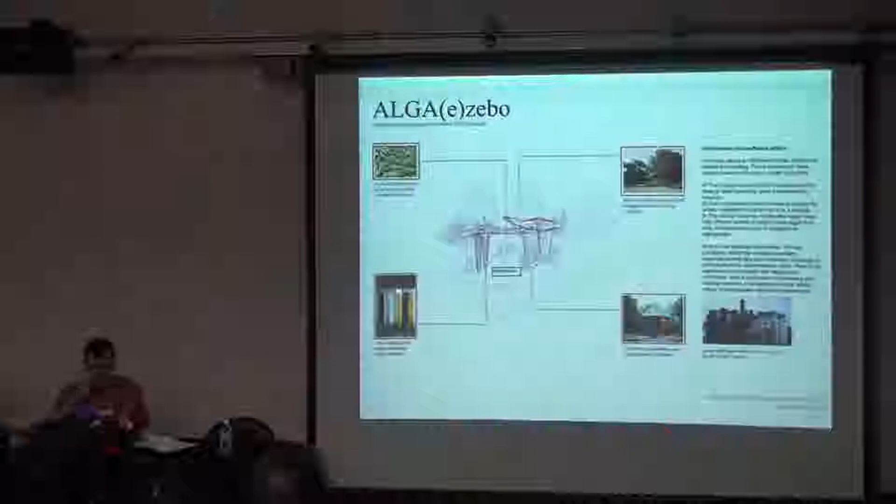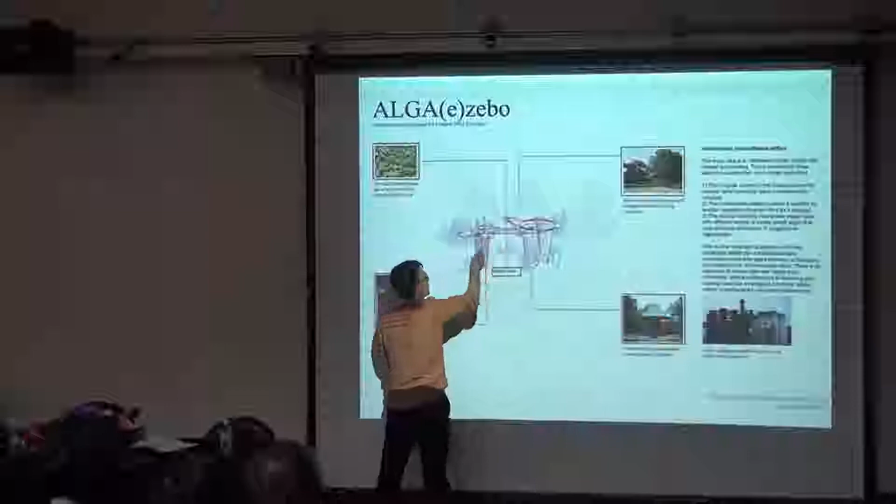The idea of this installation was to create a small structure with a canopy, a small roof, and a few columns - one you could sit in, another would have algae. The merger with nature would happen on three levels.

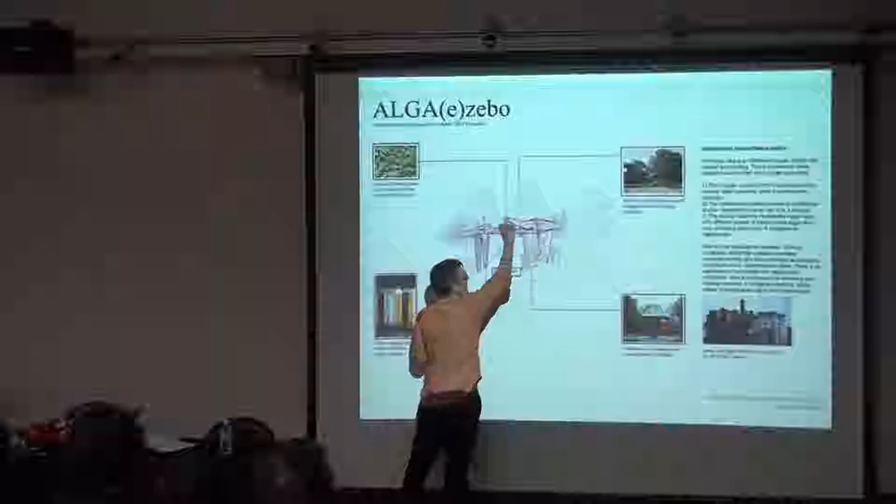On one hand, you could have it really seen, as you'll see in later images, as a piece of nature - it itself looks a bit like a tree. At the same time, it would create a scaffold for ivy to grow into in other parts - more the traditional sense of architecture as a scaffold.

The third level is where the algae grows around particular 3D printed objects. The initial thought was that the algae starts growing in it, and then it gradually also has vegetation around it.

Here you see the three levels: the complex geometry of the trunk with the leaves, the scaffold that holds the plants themselves, and the algae inside the tubes.

For this, we spent a long time drawing this patternization with a script for the perforation of the steel. We used a German manufacturer - the one that did, and still does, all the complex steel constructions for Anish Kapoor.

Back and forward, a lot of design iterations before it went on site. Here you can see the components into which it was subdivided into main chunks that could be stacked on the truck, because it was all manufactured in Germany and brought to London during the Olympics, or just before.

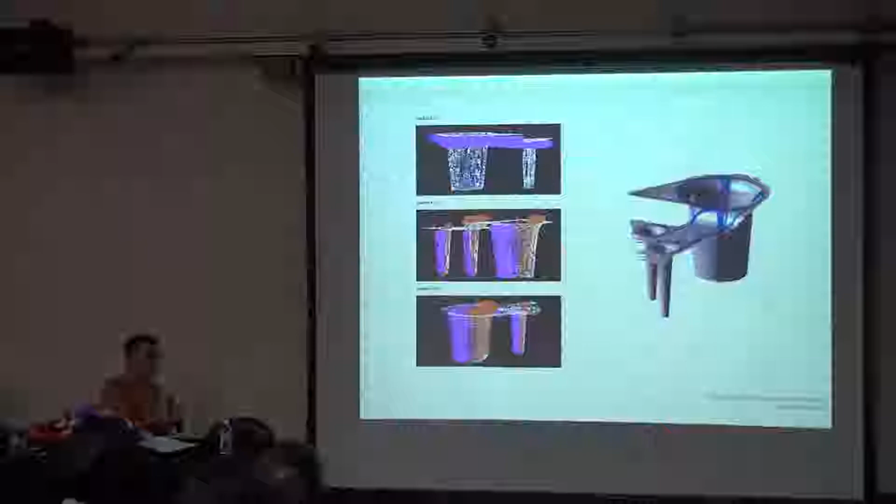In this case, even worse, because the surface was all perforated, normal surface resistance doesn't work. If you have a piece of metal and bend it, it becomes very resistant, but if you make holes in it, it becomes floppy again.

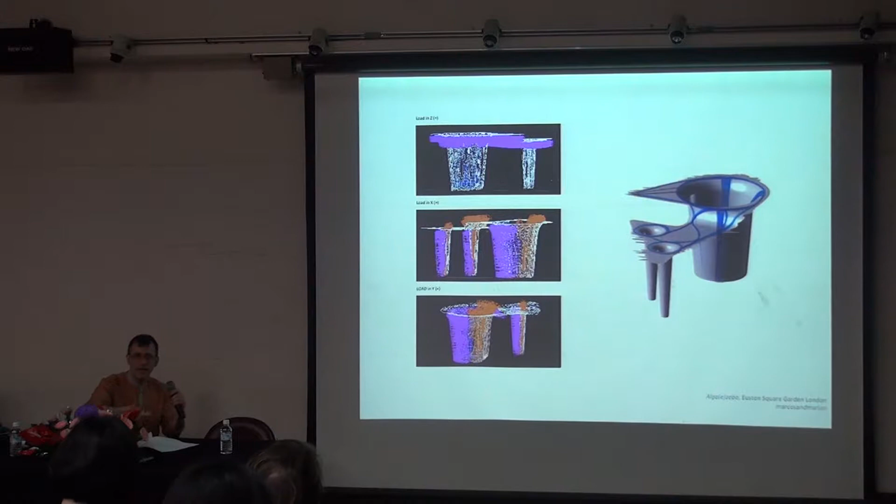So here you can see several of their tests and the platforms that were holding the structure, and then the process of manufacturing.

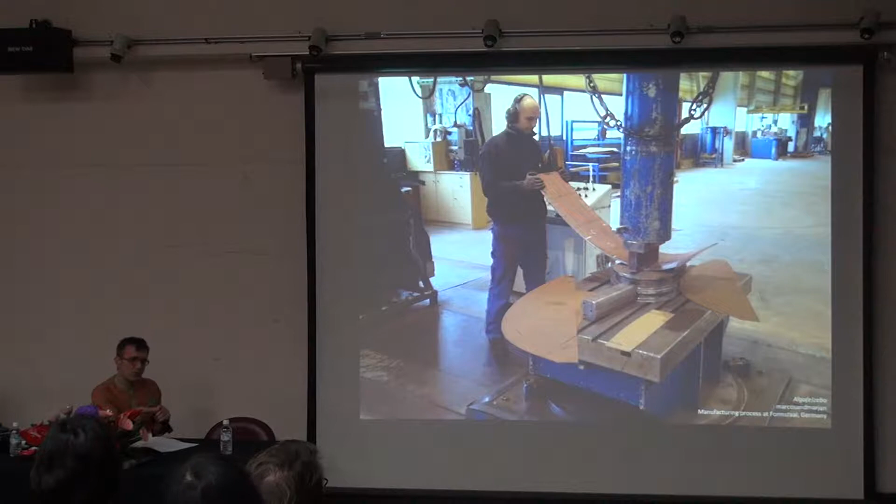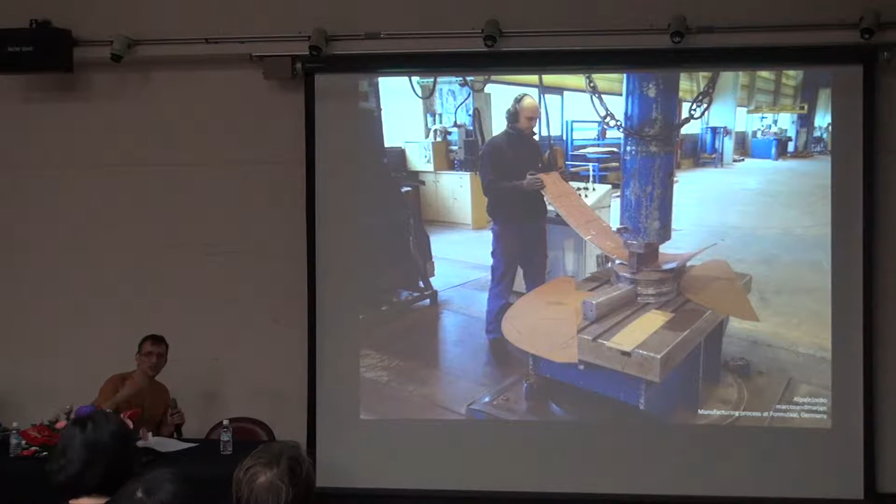These guys are specialists in Germany who do double steel curvature without heating up the material. Important about this is that when you heat up steel, it deforms, so whenever you want to bring it together, it doesn't have precision and rigor. So you need to do it cold.

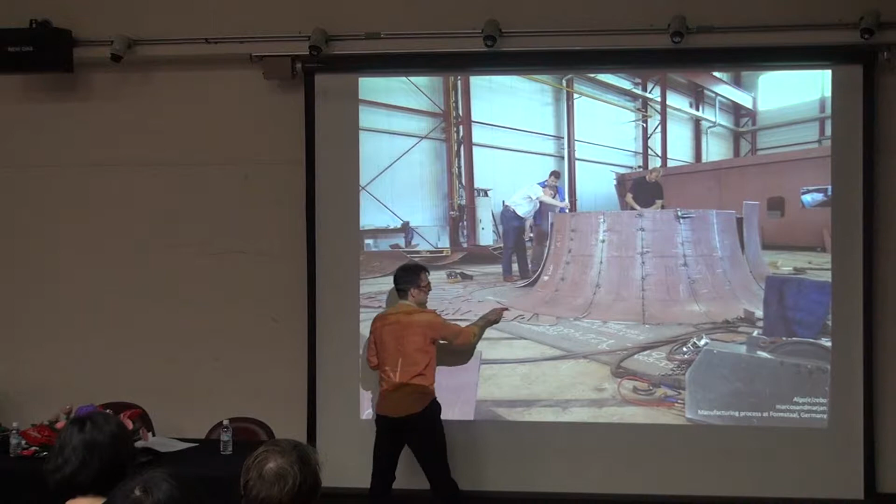And they are the world leaders in cold bending of steel. By creating double steel curvature with these rather rudimentary magnets and components, they were able to gradually do it. You see here the double steel curvature components being welded together. Some of them went through an oxycut process of perforation.

They were then joined. As you can see, the double steel curvature components could not be perforated initially, but then welded, partly by hand and partly by machines, the piece started merging. And then you get more of these, the other cones starting to appear.

You can see the different merging parts of the roof and the structure standing for the first time. For us, the fascination was the idea that this complexity of a pattern on a steel piece would ultimately look incredibly light, exactly as light as the leaves of a tree. When you see just the cantilever, you think, oh, how light is that? In fact, this has an enormous amount of weight.

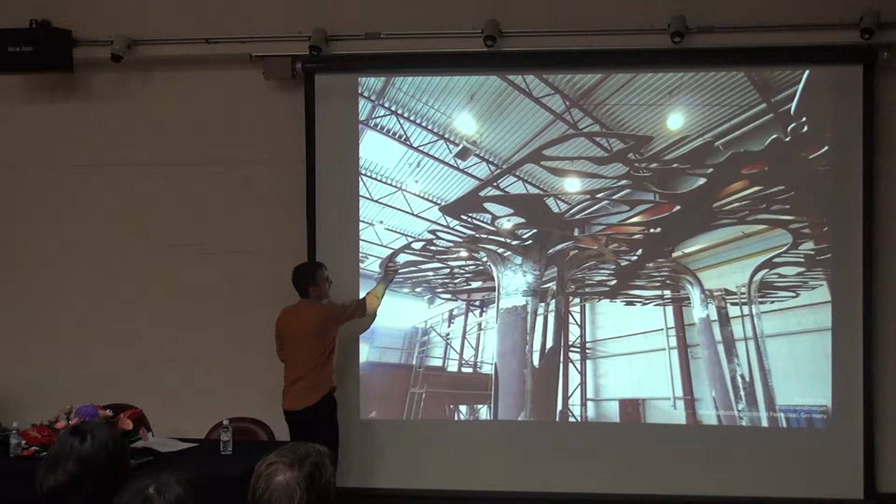But the weight that this can carry is because these branches were very carefully controlled, and the engineers were able to make it sustain its own weight.

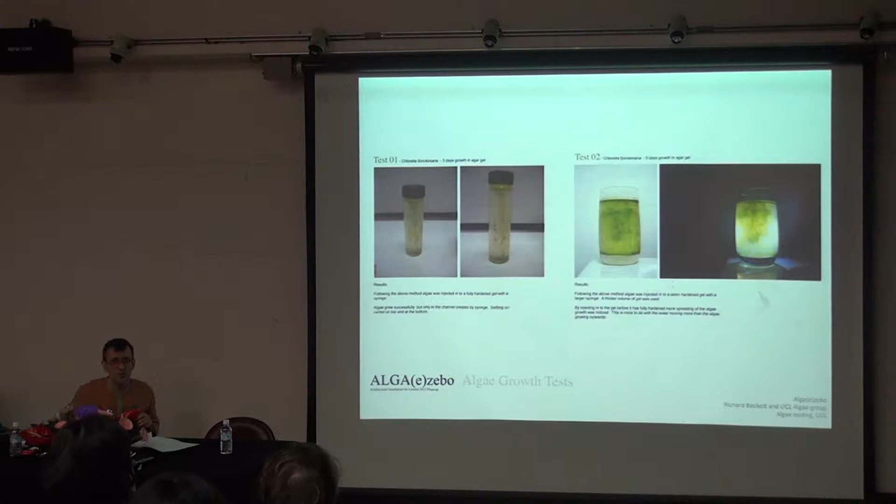At the same time, Richard Beckett, the former student who was teaching with us, who was working with the algae group of UCL, was preparing these vessels for the algae. Interesting here is that these are 3D printed components, and they are embedded in carbon. And algae likes carbon, that's why they like carbon dioxide.

So what happened was that by introducing these 3D printed components embedded with carbon into a piece of water, the algae started to become attracted by the carbon, because that's where they were feeding from.

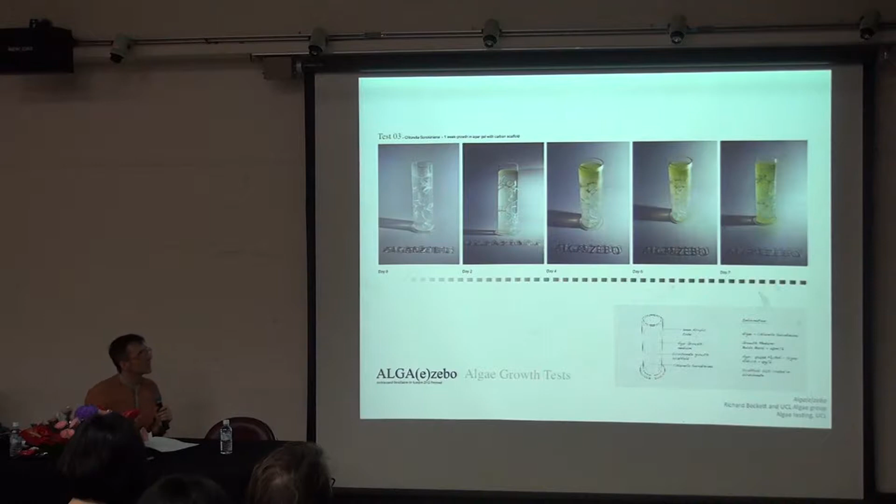We then later decided not to use water, because the problem was that with water everything becomes just green, and what we wanted was for the green to grow much more around the carbon. So we started using growth medium, which is thick. By having growth medium, the algae can't rotate around, so it becomes stable and stuck in certain places.

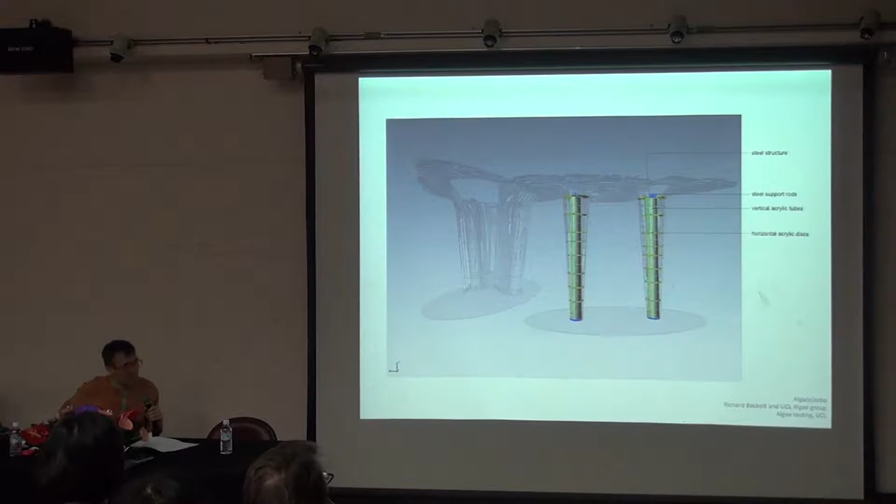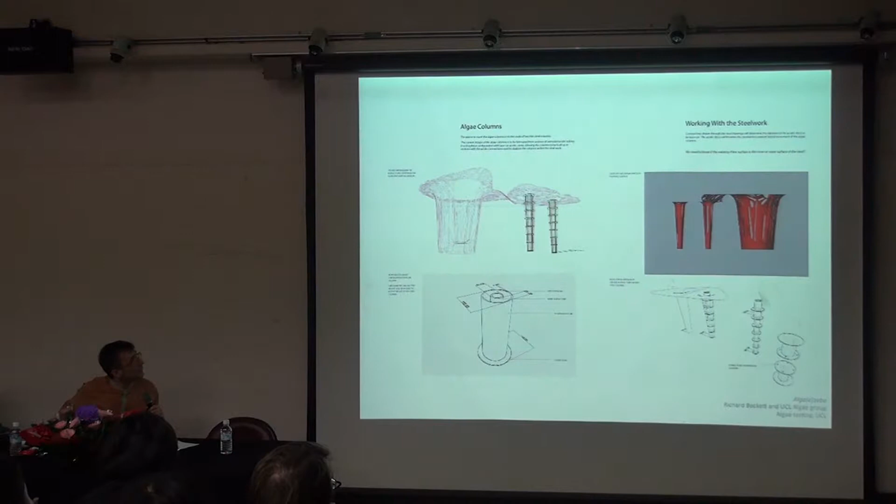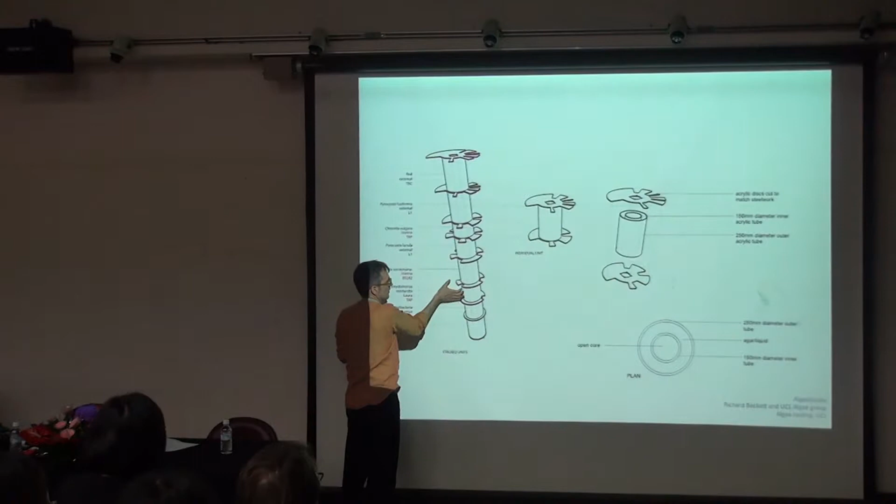Then there was a lot of conversation about how to introduce and adapt the algae components to the openings and the cones. You can see the precise measurement of these geometries, and here a whole set of applications of how this was fitting exactly to the openings of the steel components.

The key point was to bring the algae tubes and the truck with the steel bent curvature pieces from Germany and assemble them on time, so that the algae was inserted precisely into the piece. They had never spoken to each other, so we saw the algae guys and the manufacturers from Germany shaking hands, saying, nice to meet you, I knew you existed, at some point we were merging the piece.

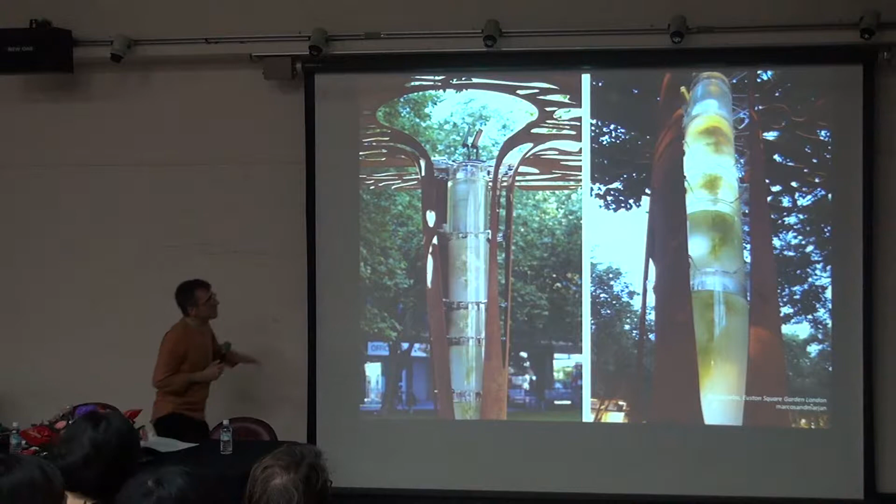And here you can again see quite clearly the sense of growth around these 3D printed and integrated components.

And then at night, the bioluminescent algae that was working in some of them was growing and blooming. I have to declare that not all of this is bioluminescent. The bioluminescent algae died after 2 weeks.

The poor guys started becoming lower and weaker until they completely stopped working. We needed to have some electric light behind it, otherwise why did it die? It died because the problem with bioluminescent algae is that it came from Scotland, involving Scottish scientists, and it comes from the sea, so the need for salt water is necessary.

Whereas the other algae that was growing is algae simply from the environment. You just need a cup of water somewhere and it's full of algae, because it's what is in the air that produces it. The bioluminescent algae has to be much more carefully maintained because it's in seawater, and even though they kept maintaining it with new seawater, after a while it couldn't exist.

The whole algae production system is something that is being tested in laboratories. It's not solved, that's why you don't see it everywhere - there are problems of maintenance and efficiency that still exist with algae. Even on the biofuel level, they haven't cracked the issue of mass and size. That's why it's not available right now at a petrol station.